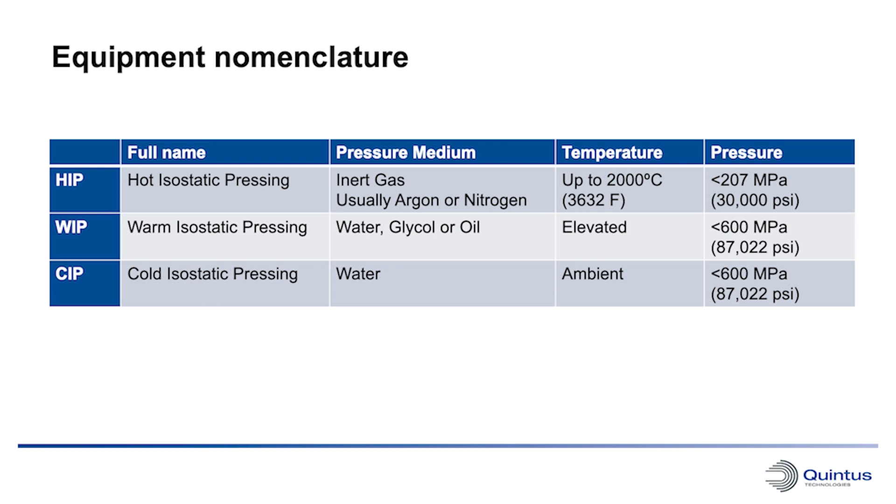Okay, interesting. So you mentioned impurities there. What happens with the impurities in the HIP if they react with the parts? What if you get oxygen in your process? They will react and oxidize the part in most cases. It depends, of course, on what kind of parts you have, but we try to get rid of those as well as possible.

So the larger HIP equipment that you have in the application center is quite sizable, but can the same machine handle different furnaces, or is it just one machine per furnace? No, the same machine can use different furnaces. So we have three different ones. Two of them are made of molybdenum and can handle a temperature up to 1450 degrees Celsius. And one made of graphite, and that can go up to 2000 degrees Celsius.

Okay, and they're all running up to 2000 bar? Yes. Or actually 2070 bar. Okay, 2070, 30,000 psi. Exactly. So what are these different furnaces used for? Well, the graphite furnace is mainly used for ceramics or refractory metals that require very high temperature. And the two moly furnaces, it depends on the cooling rate actually, because that's the difference between those two.

One of them, which we call the URQ furnace, uniform rapid quenching, has an included heat sink inside the vessel, so we can take the first thermal shock with a hot gas from the furnace and just put it into the heat sink, and take the gas from the heat sink and put it into the furnace. So then we can cool the gas with 3,000 degrees per minute. Kelvin per minute? Kelvin, yeah. Wow, that's pretty fast. Yeah, so it's just one or two compressor strokes to get it down to 100 degrees.

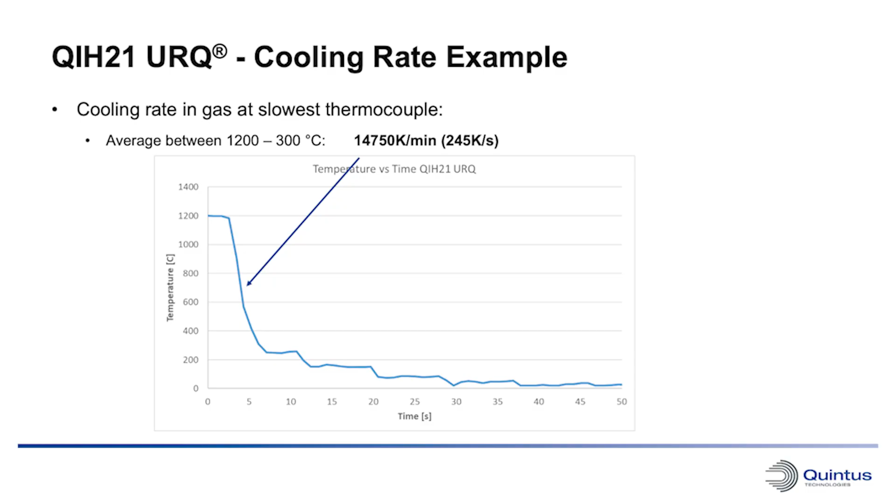Wow. So what kind of metals are using that kind of furnace? Low alloy steels require very high cooling rates. Aluminum, if you want to perform a T6 treatment, also requires very high cooling rates. Some nickel-based superalloys can require that as well.

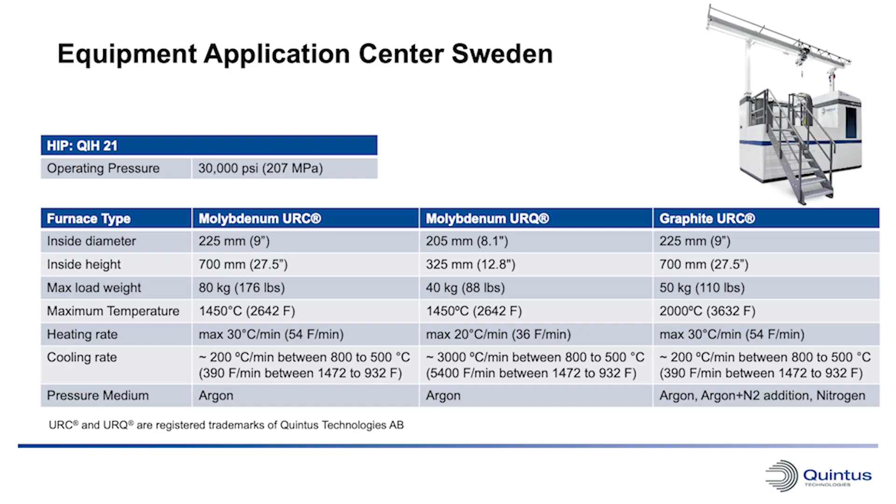And then the other furnace you haven't mentioned yet, the URC furnace, the uniform rapid cooling? Yes, that uses the whole space in the vessel as a hot zone for your parts. And the cooling rate is a little bit slower compared to the URQ. We can end up with between 200 and 300 degrees per minute in that one, but actually that's the workhorse for us. We run around 60 to 70% of all our cycles in that furnace.

Okay, and the cooling rate of 200 to 300 Kelvin per minute, can you steer that in any way, or is it just free fall? Yeah, that's also one of the benefits with that furnace, that you can steer the cooling sequence. Actually, you have 6 thermocouples in the furnace, and you can use one of them or all of them or just a part of them to control with.

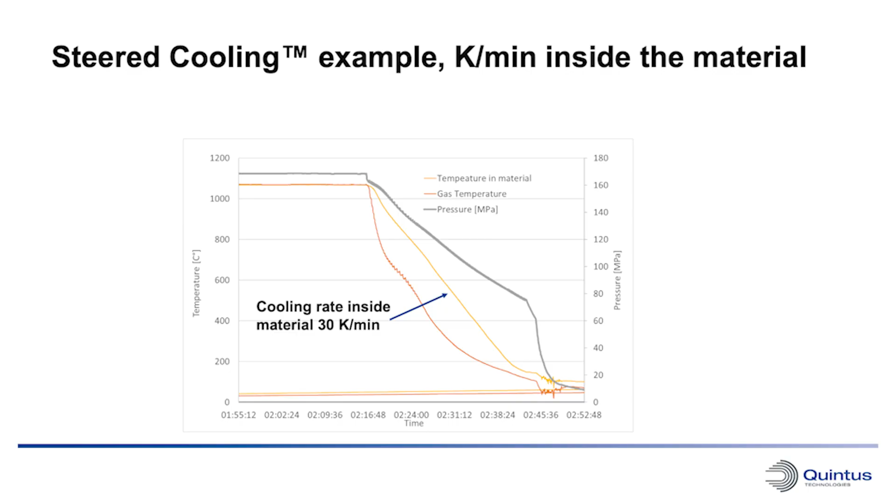So you can set that cooling temperature actually between 0 to 300 degrees, and what you want actually in the gas. Or if you take one of the thermocouples and put it inside a part and you can steer with that, you can actually control the cooling rate of that part instead. Okay, so you can actually measure the temperature inside a part. Yeah, if you put a thermocouple inside a part, you can do that.

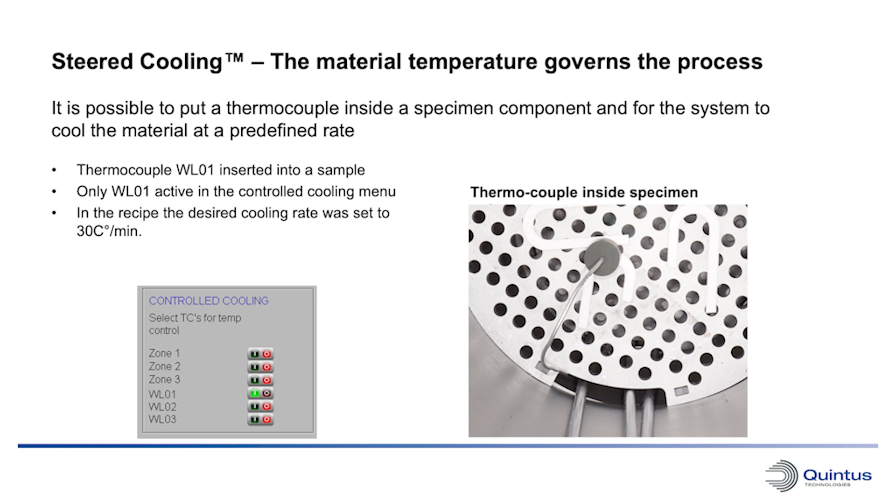Does that give opportunities then for modeling this, or to have a look at how parts behave in the HIP? Because the high pressure gas that we use circulates with natural convection during the heating sequence and also the soak time. But during the cooling sequence, we have a forced gas flow. But since you don't have any boiling or other complicated features that appear compared to when we have a liquid as a quench media, it's very easy to calculate and know how this will behave, the relation between the gas and the component, and how the heat exchange will work actually.

Okay, and do you see a difference then at different pressures as well? I mean, do you see any changes in the cooling rates based on pressure? The convection or the heat transfer coefficient increases with the pressure, or actually the density of the gas. So we will not reach water in heat transfer coefficient, but it's much better than normal atmospheric pressure air. So it's very similar to high pressure gas quenching.

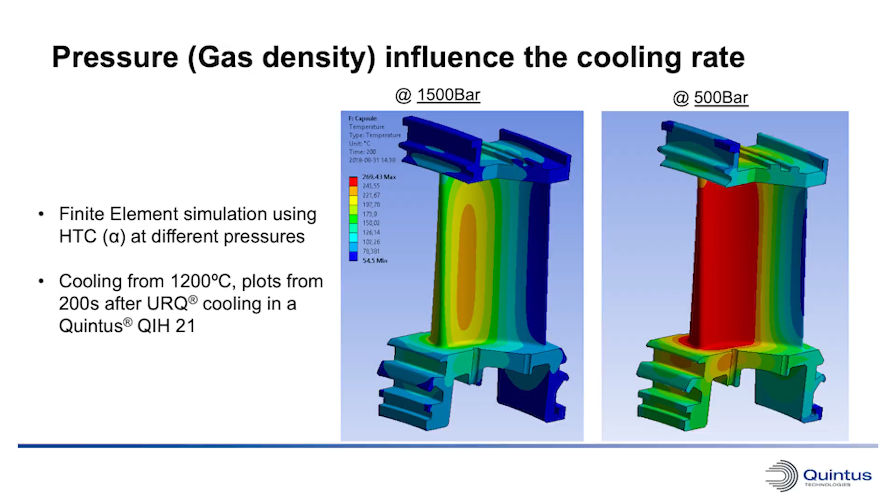Okay, that's interesting. So you can actually steer the cooling rate. You can model what's going to happen with the parts based on a CAD drawing, I guess. Yes. And then you can predict pretty much what the microstructure will be inside the material then. Yes. All right, that's very interesting. So this is combining then both HIP and heat treatment in one step. Yeah, that's one of the benefits with this, that you don't have to heat up the component and do multiple different units of treatments after each other. So you can combine a lot of these in one machine.

Okay, cool. So I know Quintus call it high pressure heat treatment. You're doing lots of different steps here. So what kind of materials are you doing solutionizing steps on? Well, mainly it's on nickel-based superalloys. They require a solutionizing step, but actually that only requires a cooling rate above a specific cooling rate when the parts have been above a certain temperature. And since the HIP temperature is above that, and if we can cool with a sufficient cooling rate, we can combine the HIP and the solutionizing step.

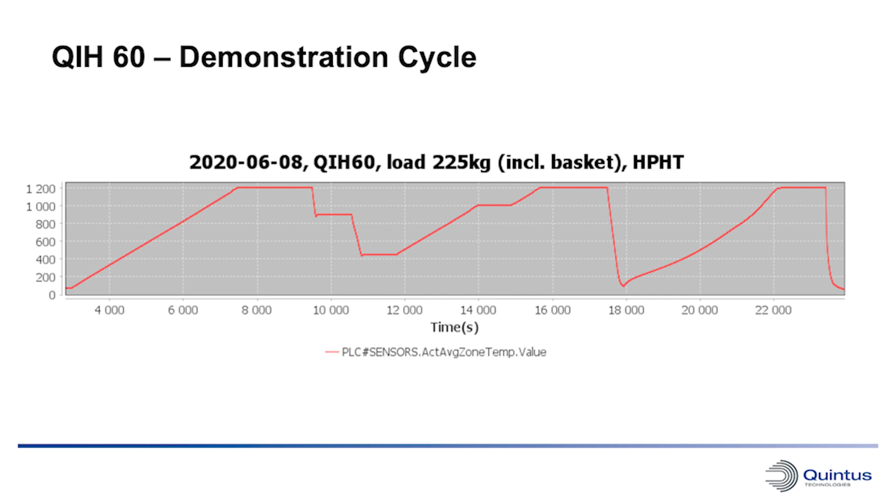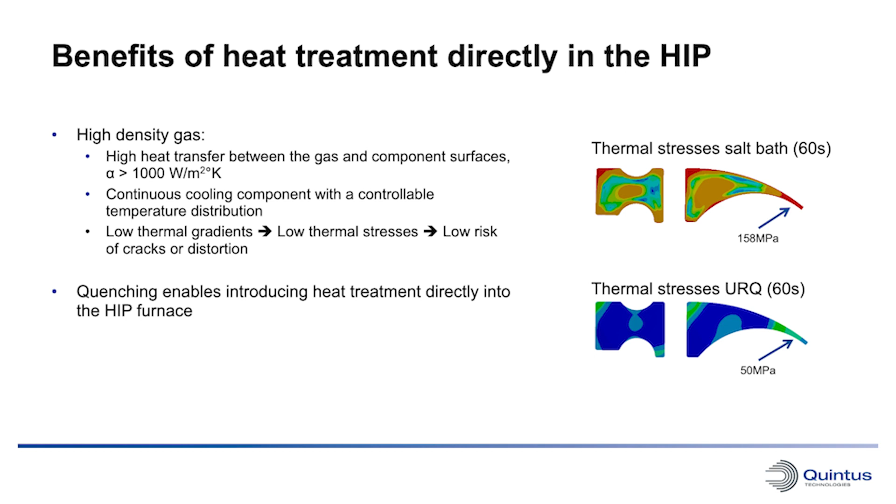Okay, can you steer the cooling rate stepwise as well, so we can stop at plateaus? Yes, of course. Since we cool the media, we don't put the samples into a cool bath, for example. We cool the media at the same time, so that will also be very beneficial for the components. You will not get high stresses or large deformation because you have less thermal shock to the material. Okay, interesting. So being able to take a stepwise cooling profile, if you like.

Can you do the same with heating, by the way? I mean, can you do the heating profiles upwards as well for specific materials? If it's required, yes, of course. It's pretty easy to program. Okay, and you can go up with pressure first, and you can heat it later. Yeah. So all these trials are possible then in the unit.

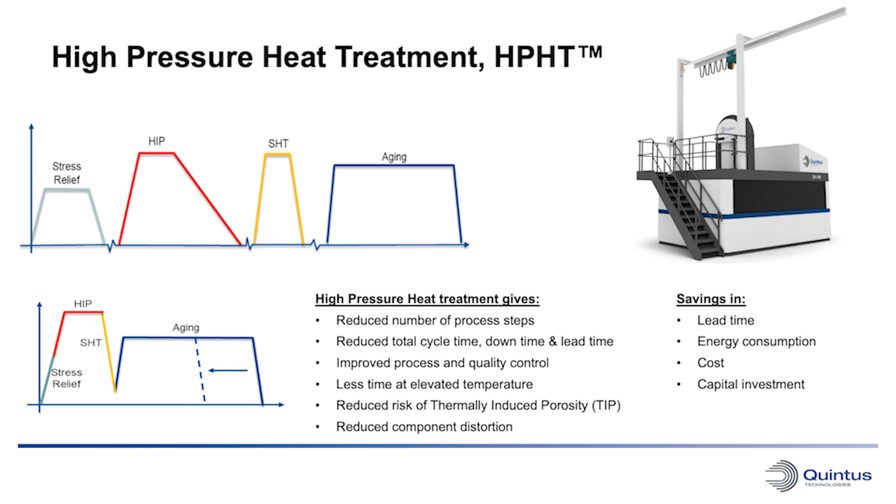Right. Okay. Cool. So on the cooling side, are you also doing aging in the HIP after the solutionizing steps? Yeah, of course it's possible to perform aging because you can heat the furnace, and if you require a certain temperature for a certain time, you can leave the parts in the furnace. So you can actually do quench and tempering as well, I guess, stepwise up and down. Yeah. Very interesting.

So you mentioned earlier the cleanliness of the gas. With the work you've been doing on trying to keep the environment clean, can you see the effects on the parts as they come out of the HIP compared with the way you used to do it? Yes, we see a big difference because we know what causes the impurities or the reactions and how to get rid of it.

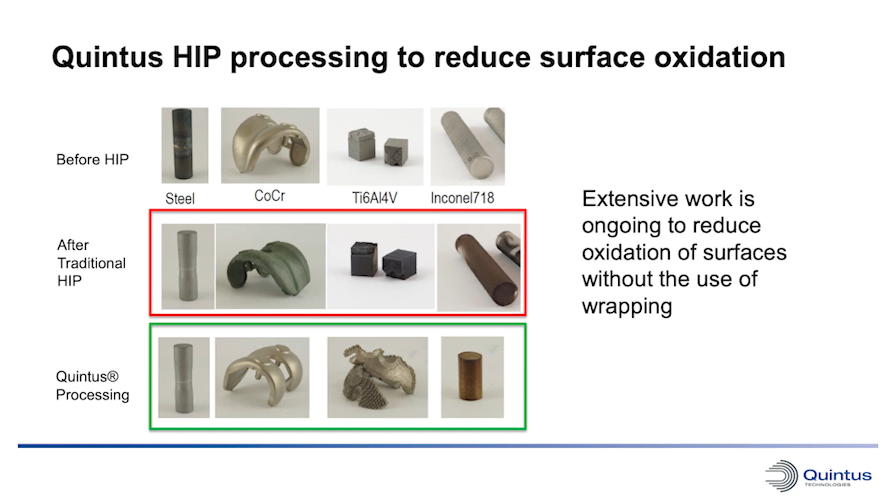Of course, there are materials that are extremely difficult to get clean because they have some alloying elements that like sucking oxygen and want to create oxides. But most of the materials where it's critical with clean surfaces, we can manage.

Okay, and so how do you know? You're looking at the chemical composition of the gas. How are you measuring that? How's that being set up? Well, in our application center, we have a gas chromatograph, and we also have moisture sensors and oxygen sensors.

And we're the only lab that I'm aware of that can extract gas from the hot zone, so we actually see when reactions happen in the hot zone volume. So we can follow the reactions. From the beginning, if we put in pure argon, we can see how some moisture can be released when we heat it up, and how the moisture will react with the parts, when hydrogen will be created, since the moisture reacts with the parts, for example.

Okay. So you've been doing a lot of chemistry as well at high temperature. Yeah. Okay, nice. So based on this, you've got different furnaces for different materials. You can do the steered cooling, very clean cycles. Yes. What's next?

Well, one next step is that we could maybe add active gases, so we can also produce an extra step, like case hardening, for example. We can add a sintering step in the beginning, so we can combine even more cycles or heat treatment methods in one cycle.

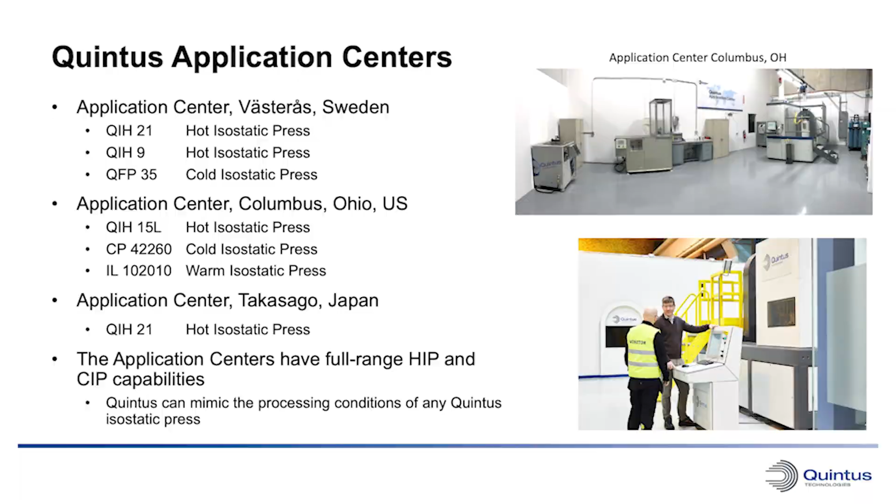Then we have a newly opened application center in Takasago in Japan, where they have a 21, a similar machine as we have here. Right, and both of those machines have the three different furnaces as well? Yes, they have both URQ, URC and graphite furnaces. Okay, so they can support basically the industry globally now. Yeah, I should say so.

So how many projects do you think Quintus is working on with the different institutes, universities and customers today? Well, I haven't counted them, but I would guess between 50 to 100, because we are involved in a lot of research projects, especially connected to the additive manufacturing industry. There's a lot of focus on that right now, and how HIP could help when they struggle with the quality of the components. How can HIP be a part of that?

Okay, so just quickly on that, on the additive manufacturing microstructures, what are the challenges? I guess there's some porosity and some issues there. Yes, they have porosities and they have lack of fusion and also micro cracks inside. And if HIP can heal those internal defects, then of course it's beneficial.

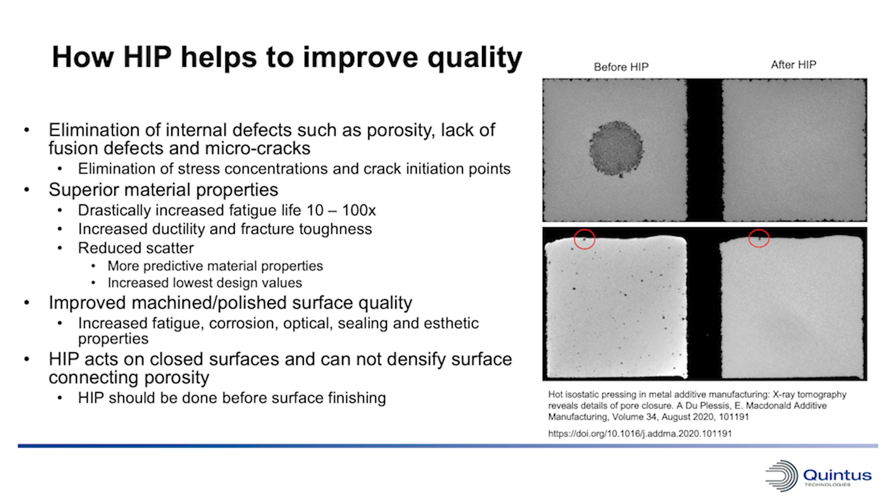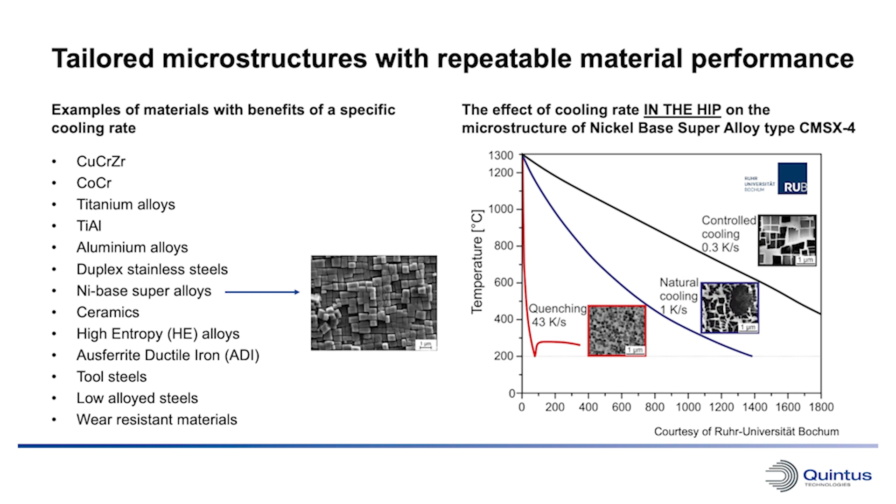So you see a change in which alloys are coming into the shop now? Yeah, I should say so, because in the past we ran a lot of titanium 6-4 and a lot of Inconel 718. We still do that, but we are now struggling with more complicated materials that the additive manufacturing industry has not worked with for decades, so they're more new for them as well, so they have more defects inside. Especially some non-weldable nickel-based superalloys are more common today.